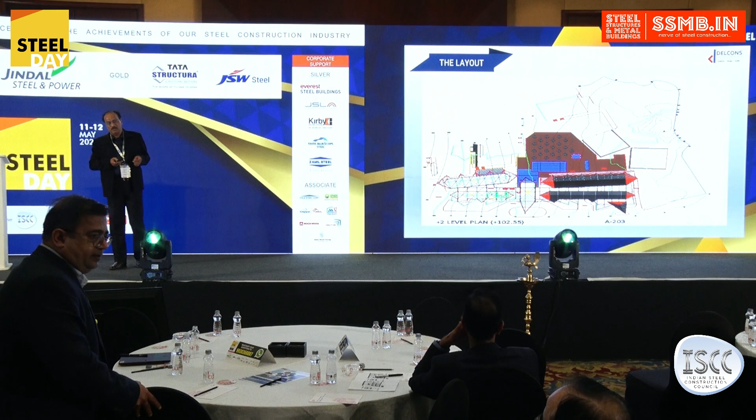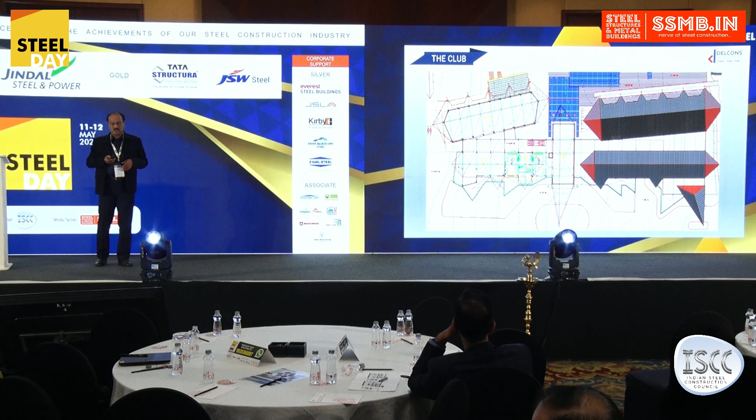This is what they call the Jade Club in Pune. This is a very prominent area near Pirangut, which is being developed, called Sunny's World. It's about a 100-acre complex, and they are trying to build a club in such a way that it becomes a premier club in and around Pune. Pune is famous for its clubs, the British culture type of things. We have famous clubs like the POIC or the Deccan, so they are trying to model this along those lines. So it's about a 100-acre campus, and they really want this thing to stand out.

When they said they want a special structure, we started experimenting. We started looking at different materials. Since the skeleton has to be seen, we were trying to find out whether we could use wood, which we thought would go very nicely. So we were looking at different shapes in wood. Then again, we were trying to model wood like steel.

But somehow all these things didn't go well with the architect and the owner. They really wanted to do something very simple; that was the brief. So even this didn't go well with them. We looked at all these types of materials: wood, bamboo, FRP. But at the end of the day, we decided that it's going to be steel.

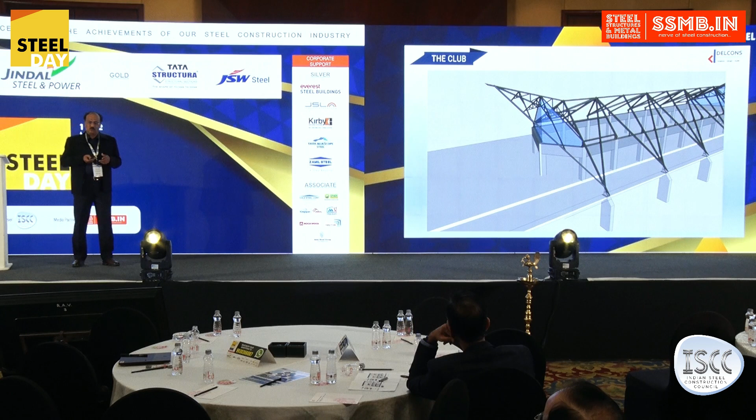As you see, these pictures are okay. I mean, you start looking at them in a little detailed way, you realize that it is not so simple as it looks. So instead of taking you through the whole thing, maybe looking at these pictures, you'll get an idea of how things are getting complicated.

And while doing this, we realized, as we say, in steel we're looking at 2D, then we start thinking 3D. But many times even the 3D may not be sufficient because of, again, the positioning of the members itself. These details were what were shown to us, but then we modified them saying that this cannot happen.

So this is basically a simple plan and elevation of what we are trying to build. You can see you have the column positions, and they want a cross between every alternate column. So we start from there. We are not going to put a truss from column to column, or we are not going to connect all columns. But this is essentially what they want us to see from below.

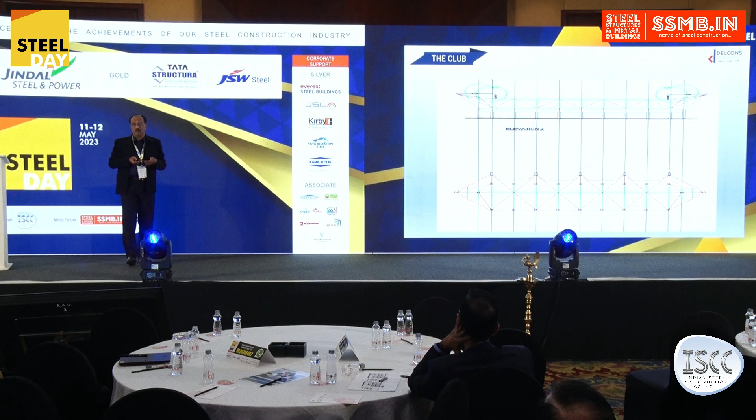Again, these are all longitudinal sections that I'm showing. I'm showing you these sections just to understand what happens in what seemingly looks like a simple structure. This is, say, the section at the first grid of columns. This looks very simple, looks very nice. As we go along the second grid, again, a little change there.

Though we are trying to retain all the slopes, we have to because the roof has to be at a particular level. Then as we go on cutting sections, we realize that things are happening a little differently again. So you see, generally, the height of the top of the truss varies from 9 meters to 7 meters. And at every cross section, at every column, we are having a different section.

We are having a different section because if you are cutting it only from column to column, it's different. But if you cut it again at the center, again the shape is different. We have shown the dotted lines for us to realize what is just behind it and what is just in front of it. I'm sure, we took a lot of time to understand all this. I'm not going to make you all understand everything in 15 minutes, but I'm trying to just show you what we are trying to do.

And again, the design challenges: the architect would have loved to have just single span structures, but with this type of geometry, it would not have been possible. So we had to put in some trusses there and some simple beams and maybe a 3D pyramid sort of thing, and then everything interconnected. I think this was the simplest section in the overall project. We are lucky to have these sections in the project.

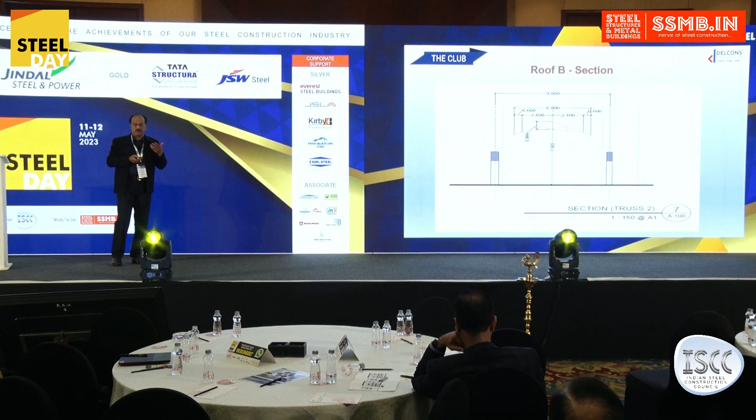So these are the sections that have been generated as we go along from column to column, and some of these are between the columns. So you can see at every level we change things, and then we start trying to analyze it, and then we get into a series of iterations of what we need to do, how we are going to use this. Again, these sort of sections where we have a huge cantilever coming out. This is about 9 meters.

And the other line you see on the other side goes and rests beyond the building onto the ground. So this so-called cantilever is not restricted only to the width of the club, but it goes beyond the club and it is grounded on the other side. Normally when we see that something is grounded, all those members going down to the ground, we are very happy as structural designers. Yes, you have nice supports, and it will happen.

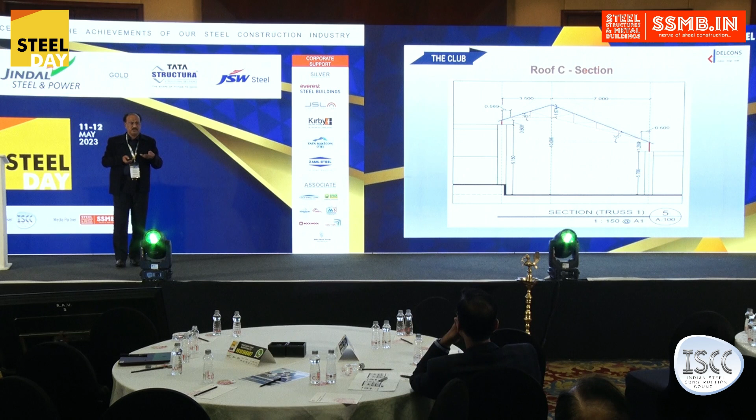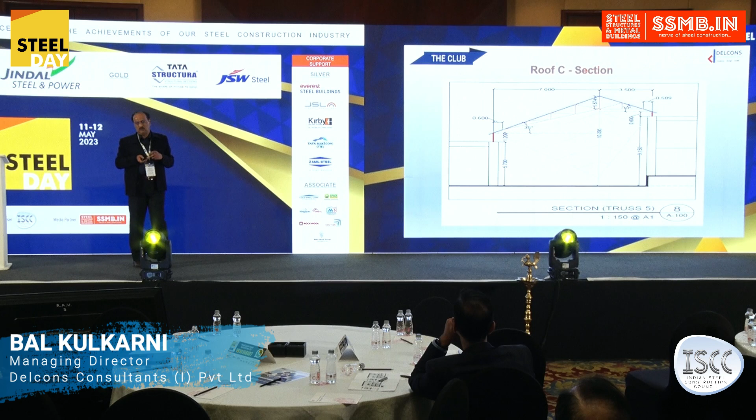Again, another part of the section where the ridge is now changing to the other side. So as we go along, we had to develop this series of options: whether we want a simple plane frame there or a truss system, and whether these truss systems are going to be supported on alternate simple frame systems. I'll just quickly run through this. Again, you can see here the ridge is slightly off-center, and the center keeps changing as you go along longitudinally also.

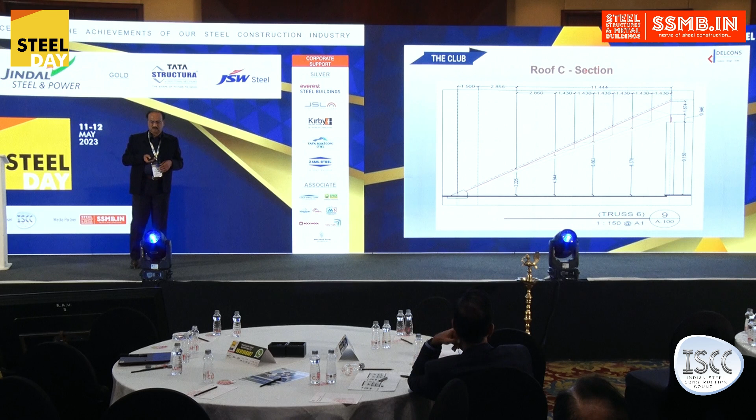This is where it goes down to the ground. This is the portion which they are trying to build now. Again, as we say, this truss comes out from the center of the building, and the other end is grounded maybe 6 meters beyond the building.

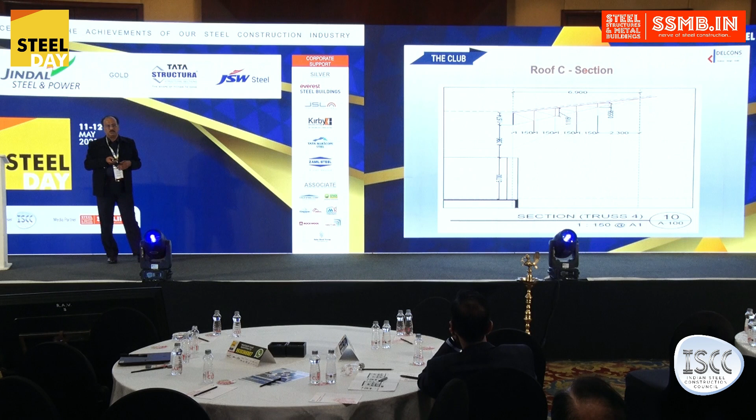So these are some sort of trusses, the way they wanted the whole thing, not connecting the columns but interconnecting the columns, but no symmetry, so to say, everywhere. Two spans will have some interconnecting members, but the other two spans they would rather have something else. So especially for these cantilevers, we really had to think where we can give a simple member and where we need to break it into sections with trusses.

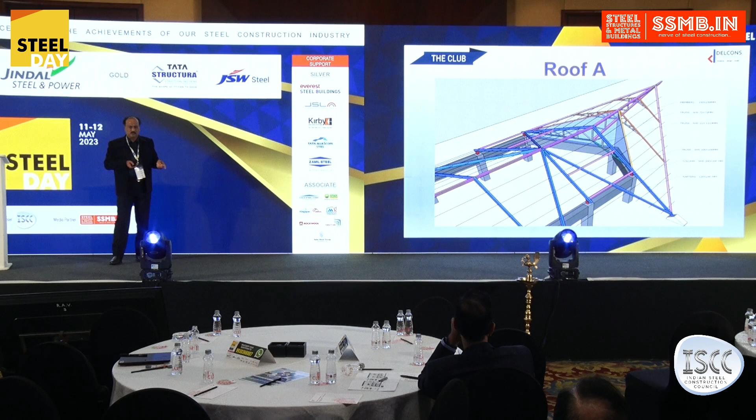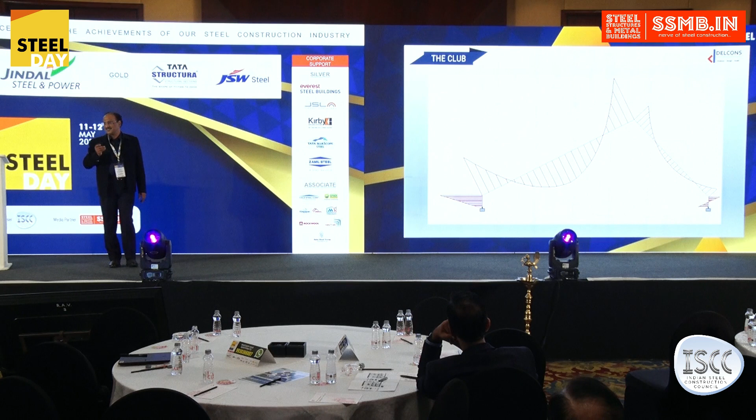You can see the end span. We have made a truss because we have to support all these things which are coming out from there. This would have been the simplest bending moment diagram. I think this happens only in one location in this whole analysis. We would have been very happy if this had been the section all through, but as we go along, it keeps changing.

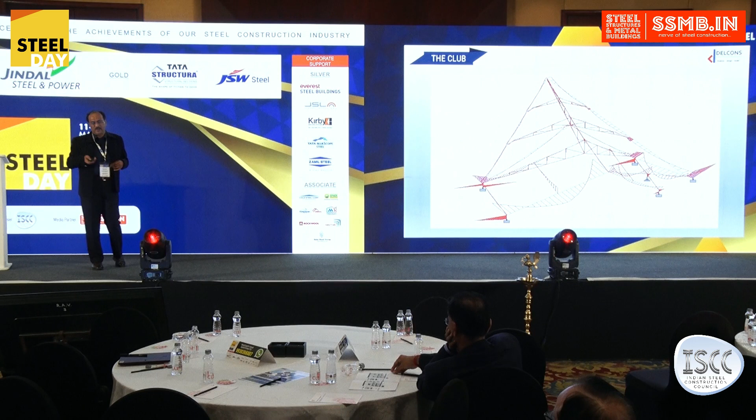So here now the iterations come in. Whether all the triangular trusses going out of the building are supposed to act like cantilevers and my fascia beam becomes a simply supported member, or that becomes my supporting member. So all these keep on iterating. And wherever it's grounded, it's much easier. So you can see that for one particular cross-section we get very good, decent analysis results, but the rest we have to keep on experimenting with what would be the best.

The next issue would be the connections. We were choosing sections based upon the forces, but also in the sense that we wanted all the forces to be contained within the section. We did not want any additional members or any additional plates for the connections, because that may not look so good. So sometimes our selection of the members was based upon the connection. We had to determine the periphery and the type of force to be resisted, and then we selected the sections.

Again, you can see a typical roof type of detail. But as I said, we can trust the architect to complicate things. You can see that the framing they have planned is not only from column to column, but also from wherever it is grounded. You can see the columns on the outside. These are also taken as supports, but then the truss would span from the last column to these grounded elements. So this was the basic first cut that we did.

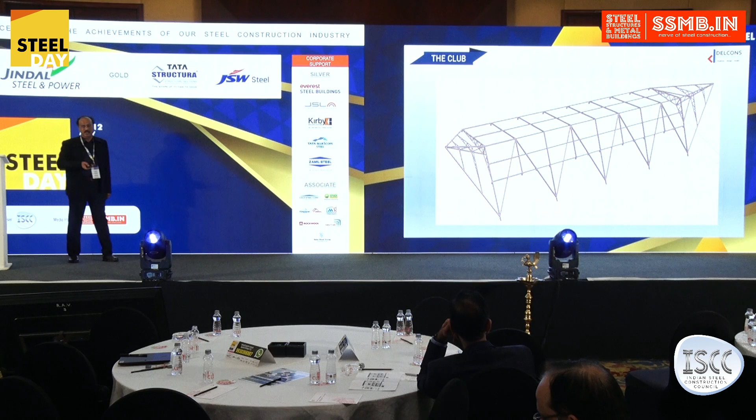And we are now progressing. We are finalizing our design, but we are waiting for them to complete the adjacent portion so that we could begin. We have already begun the fabrication, but until the side supports are ready, we cannot do all those things. This was something we had suggested should happen like this: a truss going from column to column, a simple bending moment diagram, and the end grounding would be a simple beam. But somehow, this is what we got.

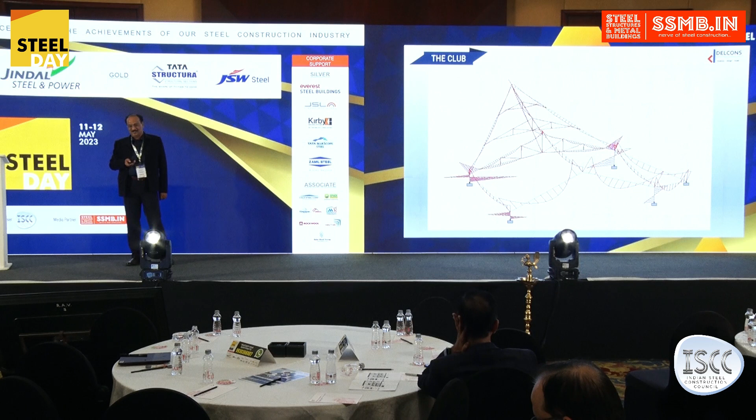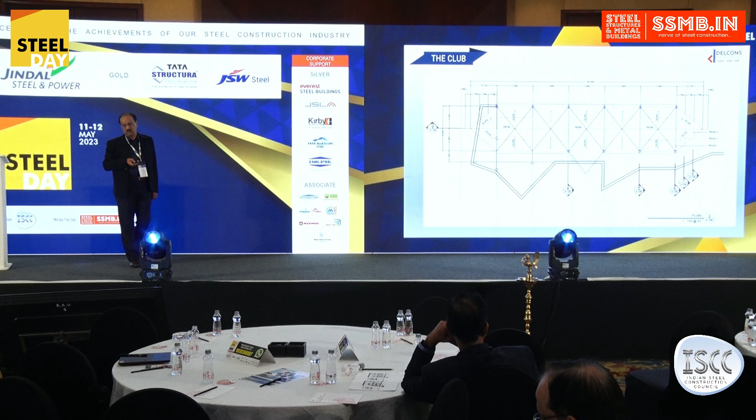Again, this particular shape of the truss was because they wanted it to be seen in the elevations. You can see the elevations are defining the shape and the alignment of the truss. So if you recall those sections, you will find they depend upon these elevations. This is a typical layout where everything else is not happening. So we have 3 buildings like this.

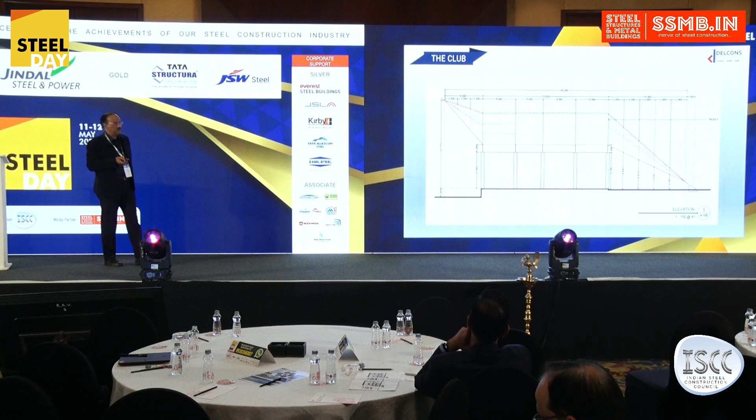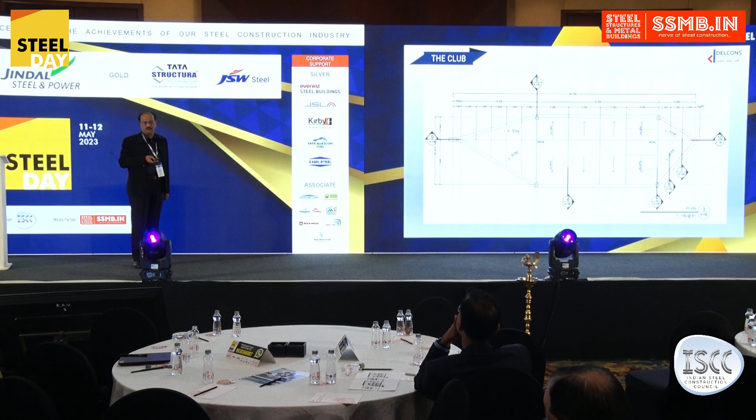Again, some lateral sections where you can see that though the ridge looks to be in line, the internal cross sections are varying a lot. So seemingly simple, but we have to keep on thinking of different formations, different configurations, and try to fit into simple basic engineering analysis as much as possible.